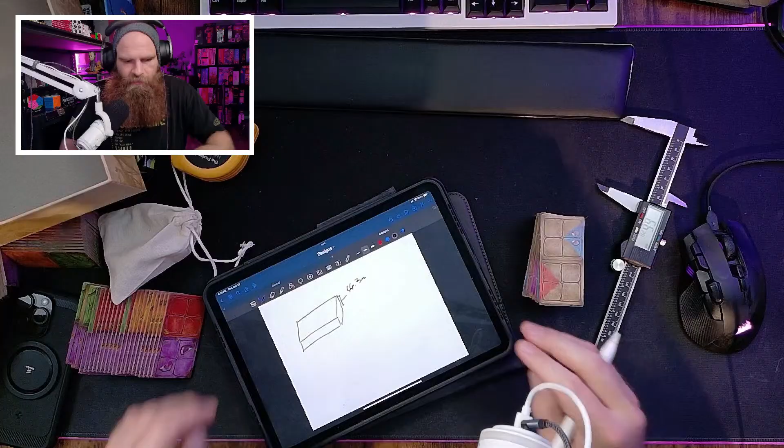So, rectangle, and there's a box. It is 66.3 millimeters in this direction. And what is my width? This box is 180 millimeters. So this is 180, so I have that much room to make.

And really, I don't need too much craziness to make this work. I can make this work with less craziness.

But basically what I want to do is have a tray like so, and then it has the 5 pieces in there. I should probably draw on the 5 pieces first. And in some way be able to grab each piece and then set them down in front.

So let's, man, so many drop frames. What in the world is on the internet right now? Are people destroying things? Let me take a look at the speed test real quick, it shouldn't be that bad.

Yeah, 33, I mean, nothing wrong really. But, you know, it is YouTube, it could be a YouTube problem, most likely a me problem. Oh, now there's no data. Oh, 289 kilobytes upload, oh look at that, I'm getting almost 70 megs up. This is dumb, this is dumb. It is what it is, but we'll bear through it.

So we know it's 66 millimeters tall, we know that we can work with that. Actually, that's the wrong, it's this side, that's 180. Really, so this is 180 millimeters this way. The piece needs to fit in here. And there's going to be a lot of extra room.

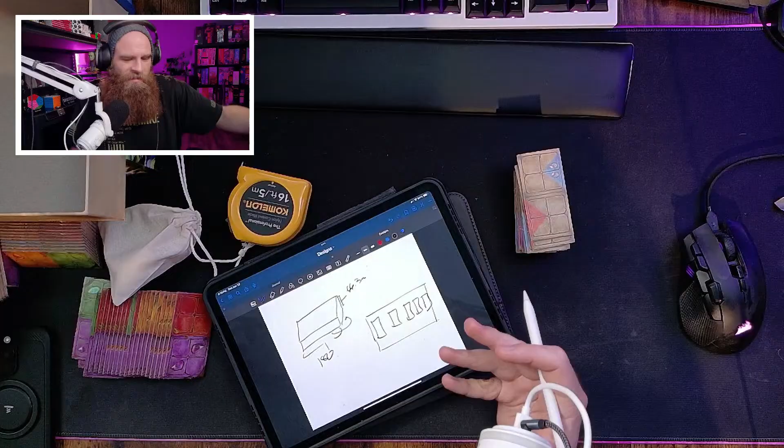I might actually be able to condense both games into one box and then not have both boxes. I mean, that's fine too, or find a new box for it.

So many drop frames, 50% drop frames, this must look horrible. Let me figure this out, hold on. Because that is unwatchable if it's 50% lost frames.

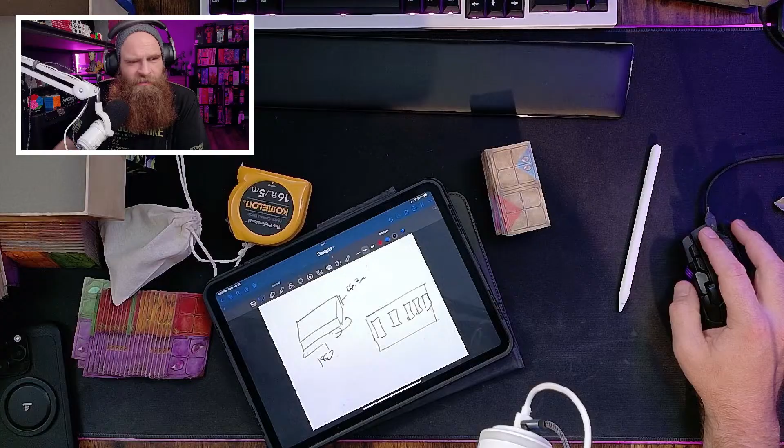No, actually it's showing up fine. I don't know why it's showing so many drop frames, but I turned all the settings down so that would be easier to upload. But it is what it is. All right, let me open up that bigger.

All right, so what I want is a tray. So if we're to sketch this tray out, basically I want these U-shaped finger grabby abilities, that way you can get your fingers in there and grab pieces.

Double tap, boop, delete. Let's draw the finger holes first. So finger hole, finger hole, finger hole, finger hole, finger hole, connect them all. Yeah, something like this. Yeah, my sketches are horrible. But let me put some numbers down here.

Let's do some measurements, what is one of these bad boys? So one of these bad boys is... oh, that was weird.

Alright, one of these bad boys is roughly 81 millimeters. Always give yourself some room. 81 millimeters by 40 millimeters.

Okay, and then how about the other ones? These I think are a little bit wider. Oh yeah, they are 40.09, so 41. How about in the 81 direction? 80 millimeters on the dot.

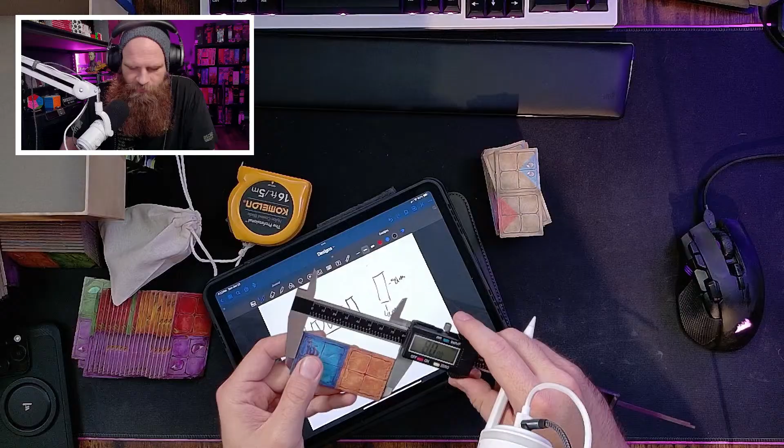So what we'll do is we'll make them fit both. So if this is 40 millimeters, we'll make them 41 by 81. So 41 millimeters by 81 millimeters. And then I need to repeat that 5 times. And then I need to figure out the design, how to put a lid on it.

So let's figure that out. Let's go back to the CAD screen. Right screen? Yes. And put everything back in the box.

So much of a mess I made here. Look at all this stuff on here. I'm just going to put everything in the lid, and we'll figure it out later.

And then what is my height? I forgot that. Overhead, boom. Nope, wrong one. Overhead, so double check. 2, 4, 6, 8, 10, 12, 14. It's 18, yep. What is the height of 18 of these?

It is roughly 47.08. So we'll say 48 millimeters tall.

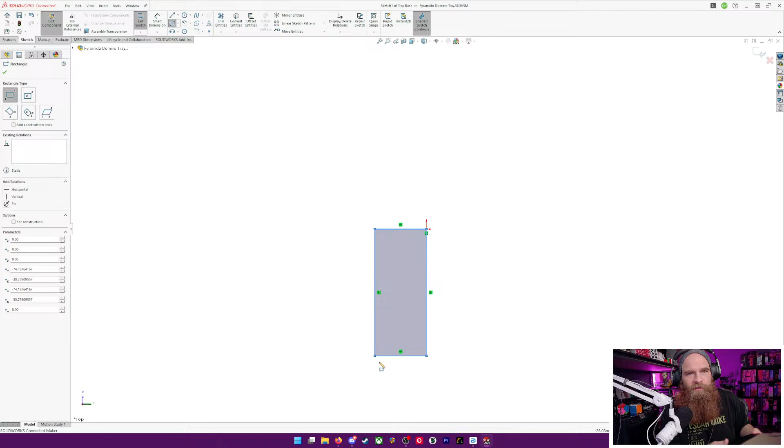We need some rectangulars. So we know that we're working with a value of, let me grab my iPad and actually have it set up with my value so that way I can just go back and forth. So we know that they're going to be 41 by 81.

And I already did not write down the height, so I forgot. I think I said 63 millimeters, I don't remember. 46. So we'll do 48 millimeters tall for each tray. Done, 48 millimeters tall. This is why I have an iPad.

All right, so dimension. So each one of these trays is going to be 41 millimeters by 81 millimeters for each piece, each one of the dominoes.

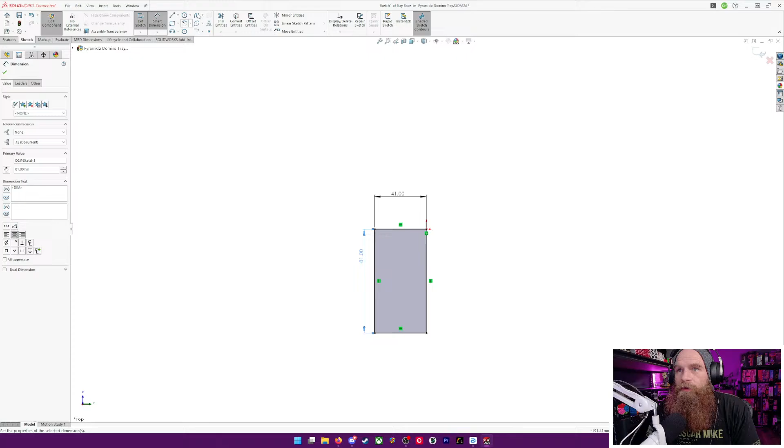And then we are going to linear sketch pattern each one of these. Boom. And we're going to make 5.

And we need to make them, see if they're 41, we'll give 3 millimeters for each one, so that's 44 millimeters. So basically what I did there is, since each one is 41 millimeters, I know I want a gap in between each one. I think 3 millimeters is a little thin.

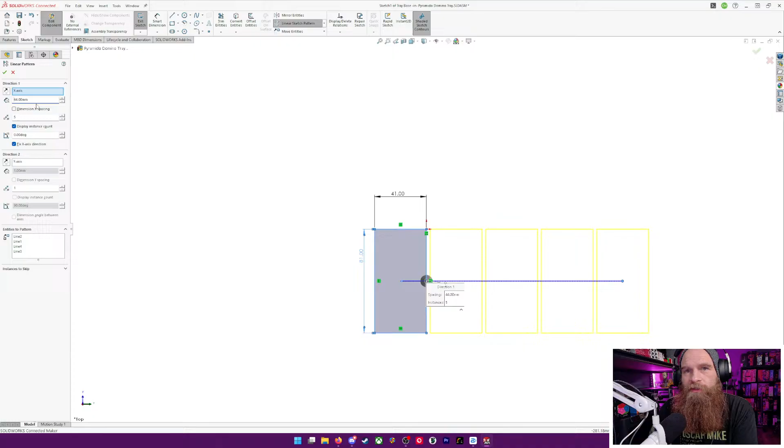We'll do a 4 millimeter wall between each one, so that'll be 45 millimeters. Basically adds padding in between each one. It'll make sense once I hit this button. So basically what I did was I added a 4 millimeter pad around each one, and I'll save that. It's 4 millimeters. So now we have 5 of these, and they're gapped 4 millimeters apart.

You just had dinner, probably continue setting up my new laptop. You have a new laptop? Dang, what kind of laptop did you get? I'm doing good.

So this gives me the dimension I need for my base with each section in there.

So now I need a rectangle around this, and we're going to make that the same 4 millimeters around. Let's do that on the other side. So 4 millimeters, and 4 millimeters, and 4 millimeters, and 4 millimeters. Could have done something different to make them all the same, but that gives us the base of the tray.

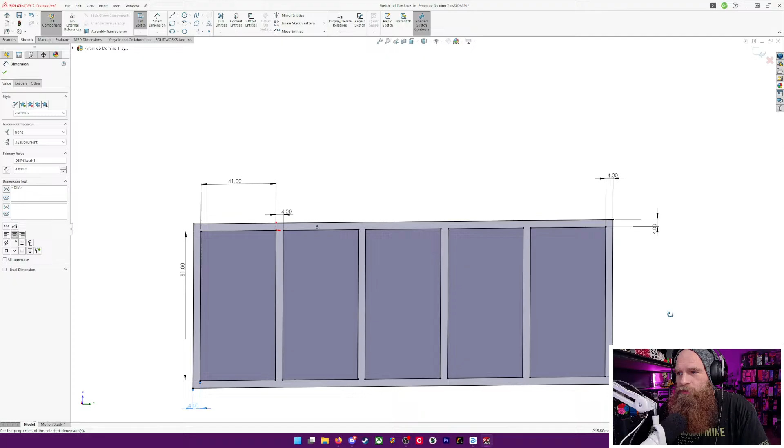What I'm going to do is extrude that the exact height I needed, which is 48 millimeters. So feature, extrude, boom, and 48. And uncheck each one of these. So that gives us this bad boy.

So now we have the sections to put things in. Of course, you can see you can't grab the pieces, but we're going to add some stuff to be able to grab the pieces.

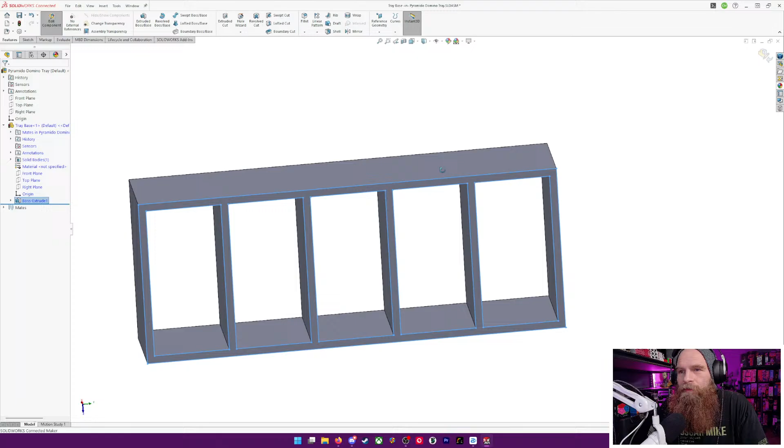All right, this is the bottom, we'll sketch from the bottom. There's a cool tool called Convert Entities, which converts the rectangle into what I want. And feature, extrude boss base, and we'll do 3 millimeters for the base, is fine. Boom. Now we have a box with a bottom.

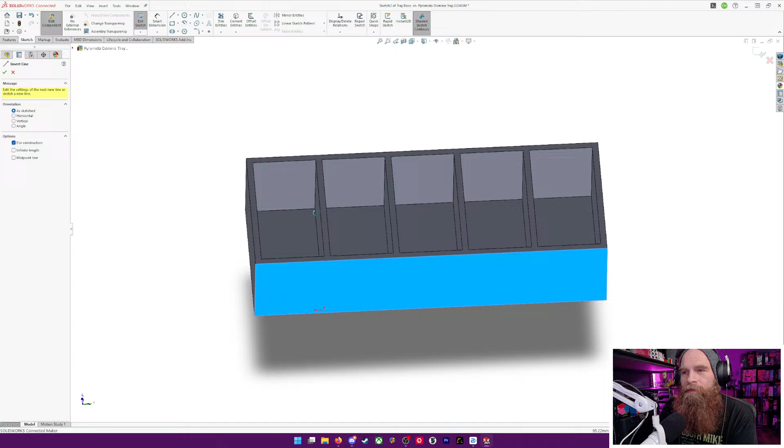Now we need to add the thumb holes. So sketch, and my favorite way of making thumb holes is, let's do a center line. So there's no easy way, because I grabbed the outside wall. The center is probably my best. So let's grab that and we'll do a straight center line from there. And we will reorientate ourselves.

And we'll add a rectangle and a circle. So what I need to do is, one thing I need to do is turn my phone to silent. Boom, do not disturb.

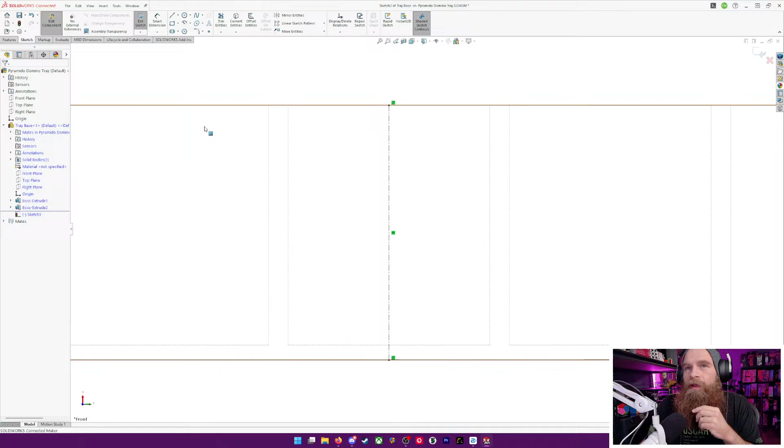Alright, so we need to make this thing clear with lines. One thing I like to do is measure my thumb, just to remind myself, and 22 millimeters. So we're going to go with about 22 millimeters. We'll put this circle here, boop, and we'll smart dimension, boom, go this way, 22 millimeters. And then what I can do is grab this circle and grab this line and make them tangent.

And then I'm going to take a line, boom, anchor point and anchor point, and anchor point and anchor point. And then we can take the trim entities tool and go boop, boop. Oh no, what happened there? That's not right, I messed up, but I think I can fix this. I think I can click this line, click this, and make them coincident. There we go, fixed it.

Whew. It's a Dell 5520. Not a new laptop, but new for me. Oh, heck yeah, are you going to use it to do all your fancy work? Let me turn on my microphone into my headset. That's up, that's better. I have monitoring in my headset, and that was annoying me.

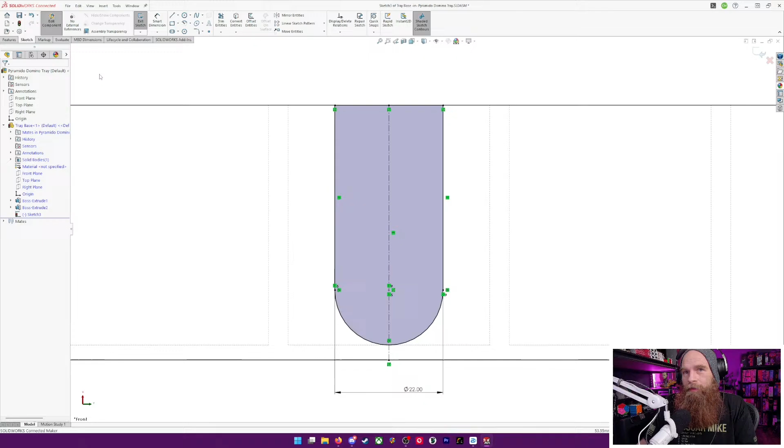All right, so we have the thumb hole, and we need to repeat this pattern. So we're going to linear sketch pattern this, and we're going to pick the y-axis, not the x-axis. None, and 2, and 3. Yes, and if we remember correctly, we did 45 millimeters before.

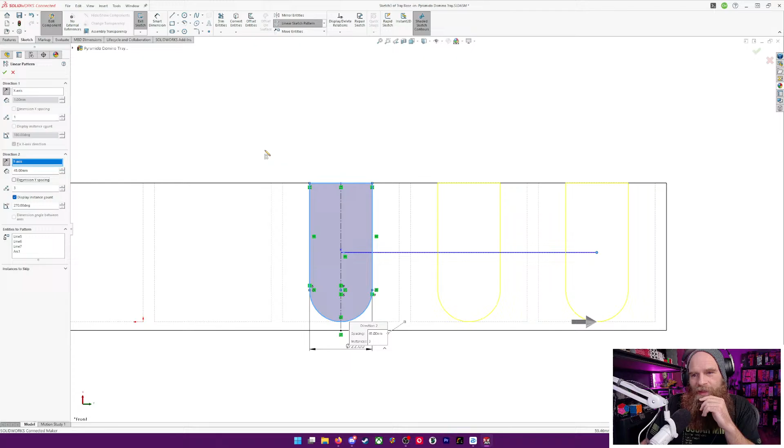So hold on, let me delete all this. Let me delete all this nonsense. Boom, that's gone. Okay, what are you? You're gone. So now that I exposed this, I should be able to do a center line from here. And I can.

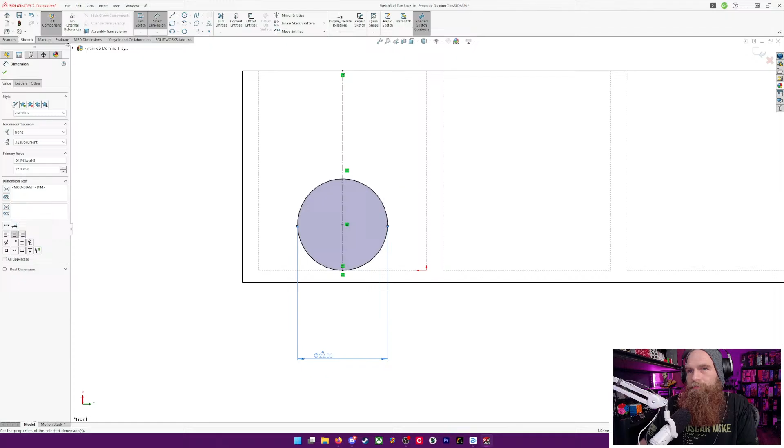And that is vertical, and we'll do the same thing here. And we'll make this tangent to this, and we will set this to 22 millimeters again. And we'll pick the line tool. And boom, and boom, and boom. Trim tool, I really need to learn the hotkeys in Solidworks. Okay, there's our thumb hole.

And now when I linear sketch pattern that, I can do y-axis 5 and do 45 millimeters. Pick the other direction. And boom, there's all the thumb holes.

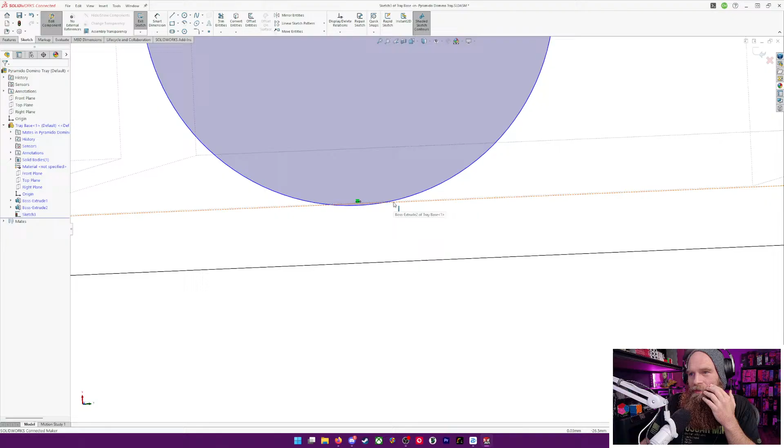Now we need to make sure we dimension these. See how these are light blue and this is black? I mean, this is blue, this is black, it's easy enough. This is telling me it's not dimensioned. So basically, in space, it doesn't know where it's at, and we have to tell it where to be in space. The easiest way to do that is to find a point, and that's going to be, let's see here, where is the center line? Oh, come on, all right, we'll zoom in and do it. So we'll grab this line here, and we'll grab, come on, you can do it.

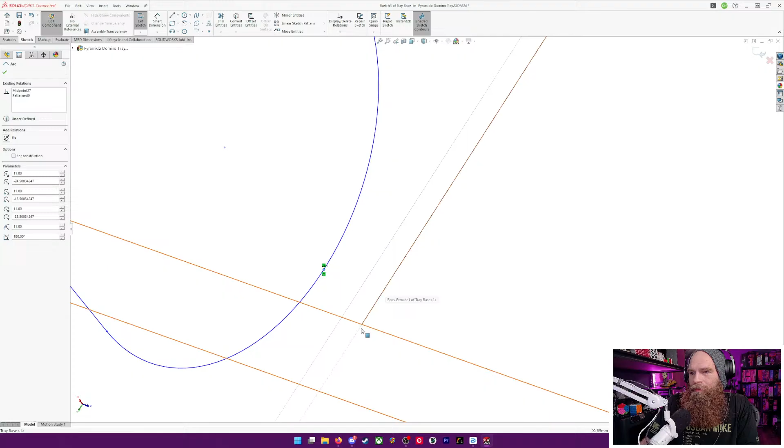It's being a poopy butt. If I go from the inside... where is the center line? In between there and there. Come on, show up. It won't let me select the center line. Come on, oh there it is. Oh it had it for a second. It wants to pop up for a second but won't do it. So we're just going to do it the way I like to do it.

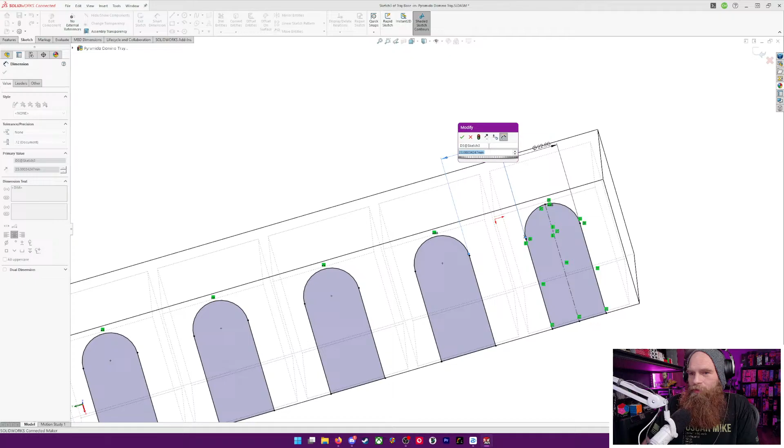23 millimeters. Boom. That is one way to do it. Not my favorite way, I mostly use it for coding, but I'll see what design apps are available for Linux.

Oh, it's a Linux laptop. Ooh.

The other way of doing it, another fun way, is if we were to dimension from this line to the corner, you can see it's 13.5. We can dimension this side to this side, and look, it's 13.5. It also dimensions it. There are many ways to do the same thing.

Now what we need to do is a cut. We need to cut all of those shapes from both sides. Why from both sides? Because we want to be able to grab the piece easily. So, feature, extruded cut, and we're going to go through all.

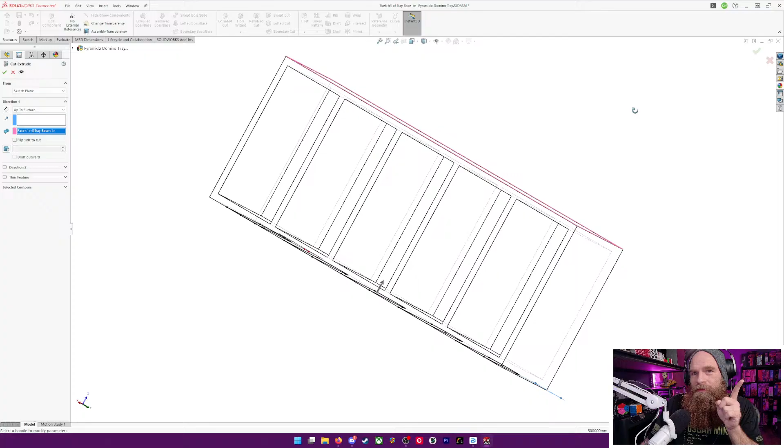Oh wait, actually, it's not going to work through all. I'm going to go up to surface, and we're going to pick this surface. And change our mode back to this. Not actually letting me do that. So we'll do blind, and let's do this.

Boom. So that gives us a little tray with holes for our thumbs to go in there and grab pieces. And we are flush to the bottom there, not even a little bit of a gap.

So the last piece might actually be a little difficult to get out now that I'm looking at it. This is the fun thing about CAD work, you kind of catch your problems in the middle of designing things.

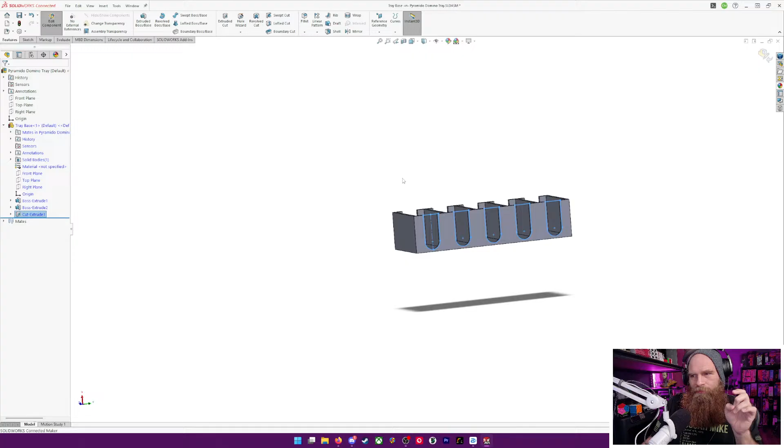Ooh, Linux. The only Linux machine I have is my Steam Deck.

Yeah, that should be fine. I left a lot of room there. Corners on these things are actually pretty sharp, so I can't do any fancy stuff.

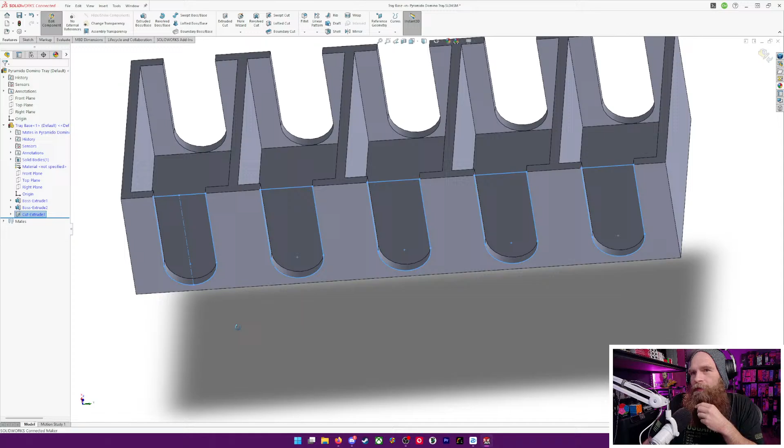The next thing I need to do is either design a lid, or, well, I definitely have to design a lid next. So I'm thinking I make a full box lid, basically just like the board game box. The lid goes all the way and covers the whole thing. That'll make it so it doesn't open up inside. I could just do a small lid, but I think I'm going to do a full lid. So let's go ahead, and I think this is all I'm going to do in here.

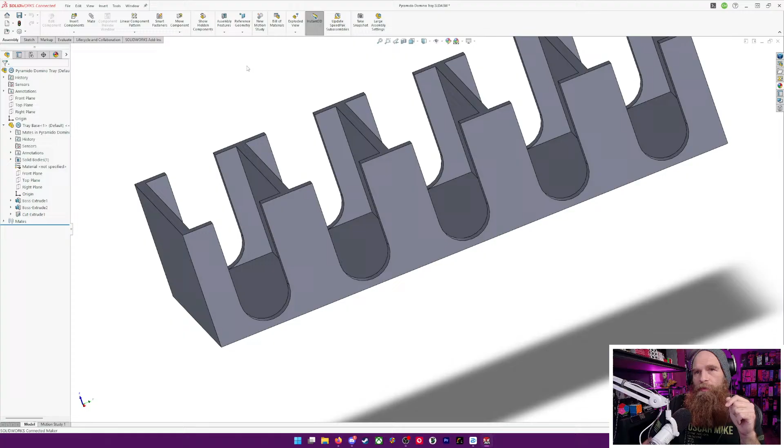So let's go ahead and exit this shape. Let's insert a new component, new part, and we're going to name this tray lid. Boom.

And made it to the roof of that. What I need to do is make a giant rectangle that's slightly, just a little bit larger than that. There are tolerances here. So let's make a rectangle. Boom. Boom. 0.2 millimeters, that's about enough of a tolerance. 0.2. 0.2. 0.2. So that'll give me what I need in that department.

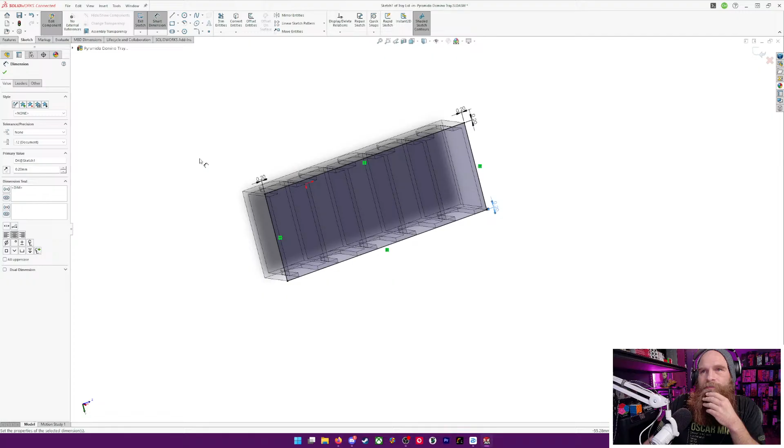Let's go ahead and features. Oh, I actually need more than that. I need a whole other box, a whole other rectangle. Boop. Boop. Again, there's better ways of doing this, this is just how I do it, don't copy me. 3 millimeters. 3 millimeters. 3 millimeters.

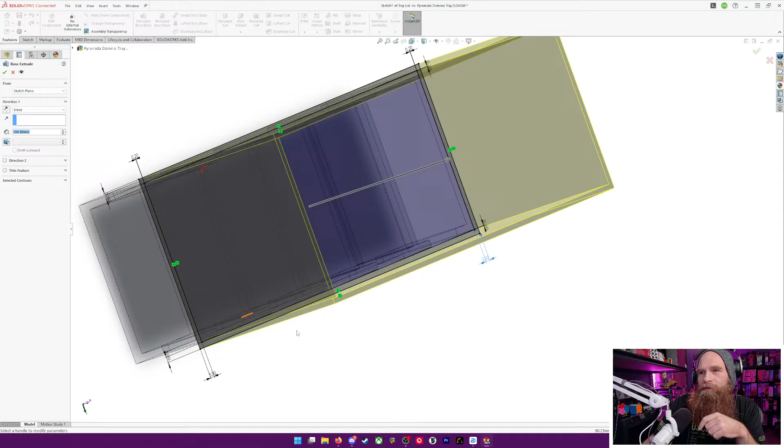3 millimeters. Now we can extrude. Feature, extrude, and we're going to go the other way, up to surface. Boom, that covers the whole thing.

Actually, we won't go all the way up to surface. Offset from surface, and we're going to do an offset of like 4 millimeters. That way you have something to grab onto. Boom.

All right, and then let's put a top on the box.

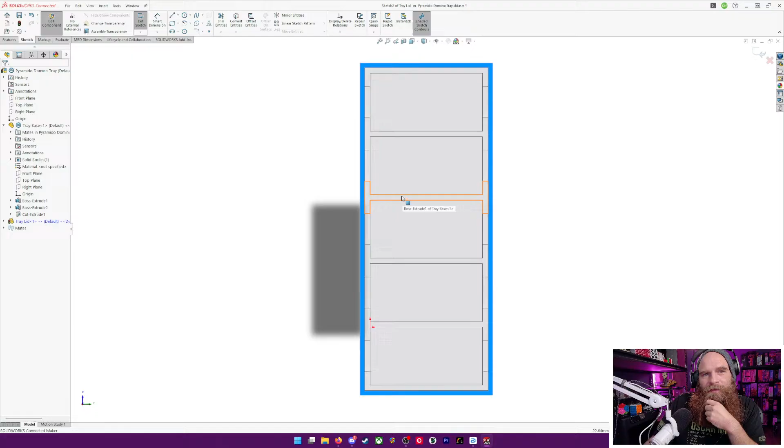Sketch. I like both Windows and Linux. I need to run Windows on my main due to some of the apps I use. Yeah, and you'll get more life out of the laptop in terms of power if you run Linux versus Windows.

All right, we need to convert entities, and feature, extrude boss base, 3 millimeters, and change that to blind. Boom, now we have a lid for the box.

So I'm going to add some thumb holes so I can grab onto that box a little easier, or the lid. Sketch. And this will be easy. Center line. There it is.

And we'll zoom in, and we'll add a little nugget hole. That. 30 millimeters. And here to here distance will be, I don't know, 55.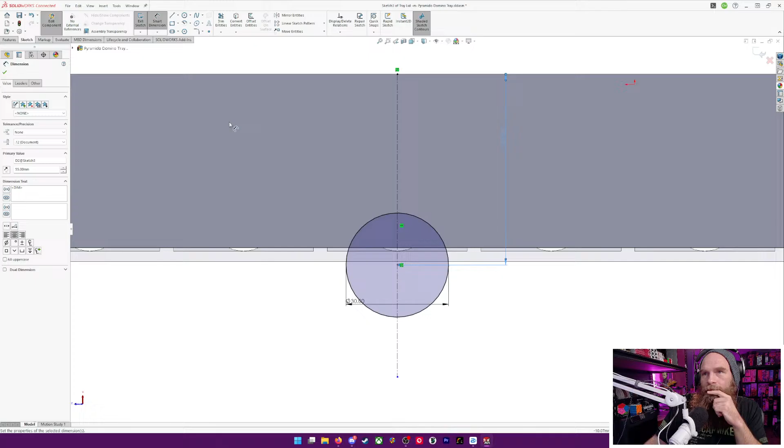Solved. And then we're going to feature and leave the dimension, and we'll make this disappear.

And we will extrude a cut, and we'll do a blind cut, and we'll just grab the arrow and grab the arrow. Blind cut through both. Boom. That gives us that.

And add this thing back. Hey, that actually kind of works out. You can kind of grab in there and be able to get a good grab hold of the thing. All right.

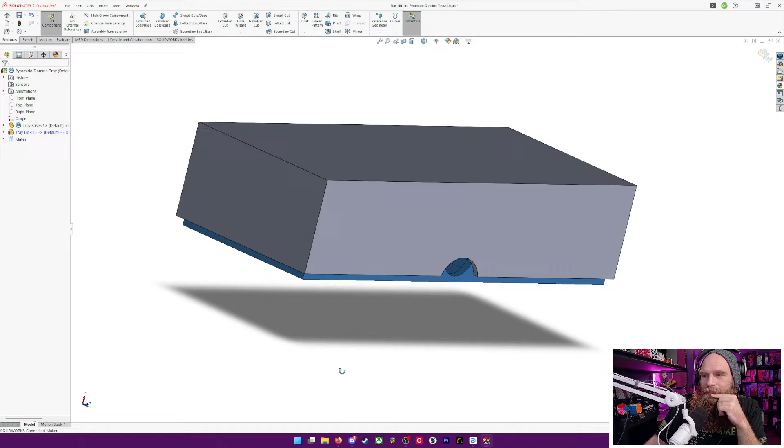And that's basically all I wanted to do. Now we can make it look pretty.

So one thing I learned from the great man Frank, also known as Grubby, is you don't do any of the fancy fillets and - what is it called, it's over here - assembly features, fillets and chamfers and stuff until you're done with the design.

So we are going to do some fancy stuff. Let's go ahead and make this invisible, and then we're going to do some curving.

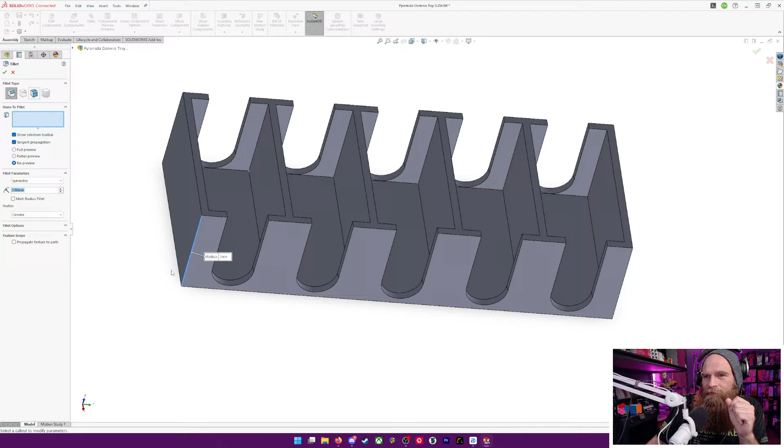So let's do assembly features and fillet. Our fillet is going to be, I don't know, do a 3 millimeter fillet. And we'll do a full preview. There we go.

It's like, why isn't it showing up? Oop, wrong direction, or wrong area. I want to fillet the... what?

I want the outside edges. Outside edges, boop, boop. So that makes the box nice and roundy there.

Boom, and then we're going to do a little bit of that also for these corners. You don't want to cut yourself. Boom, fillet, and we're going to do a 5mm fillet.

Let's take a look at what that looks like. Yes, that's perfect.

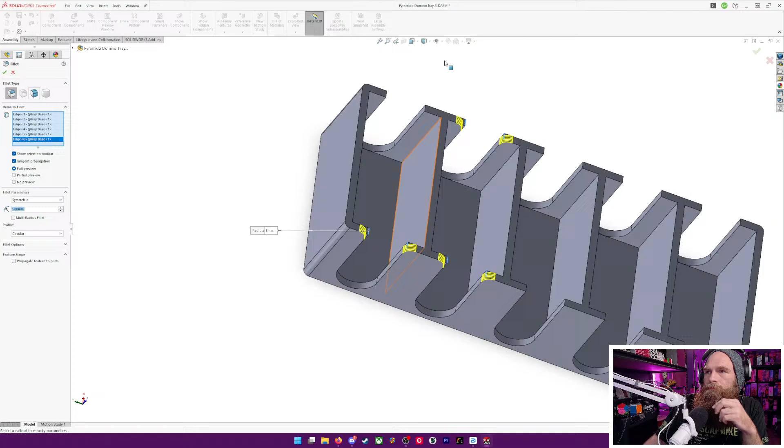All right, so close. Okay, that's all of those, and accept. There we go. Now each one has a nice little home there.

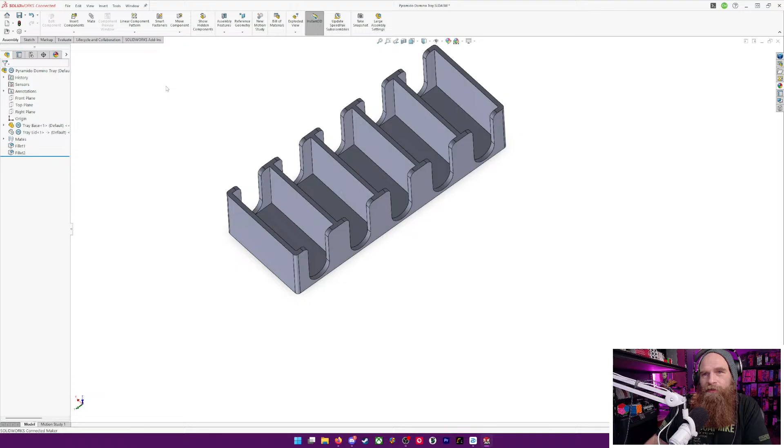And then we're going to make the box lid look better. So let's hide this. Oh, actually, let's hit save. Save all. I haven't been saving.

We'll hide that and bring this back, and then we'll do the same. Fillet. Boom. And it's going to be back to 3mm.

And boom, boom. And actually, we want to do the inside as well, because we can. Oh, that was the inside on that one. Alright, that's cool.

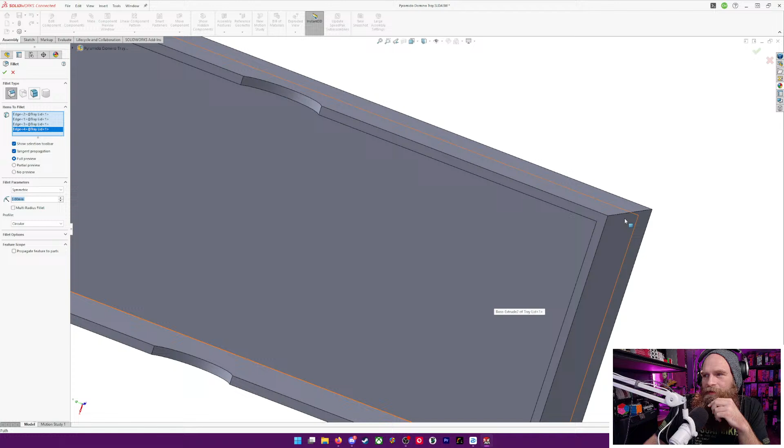You can tell I've been doing this for a while. Alright. Boom. No! Not the whole surface. Alright.

Okay. Not all of them, you silly goofball.

Okay, and I guess I'll also do this, because we don't need to cut our fingers.

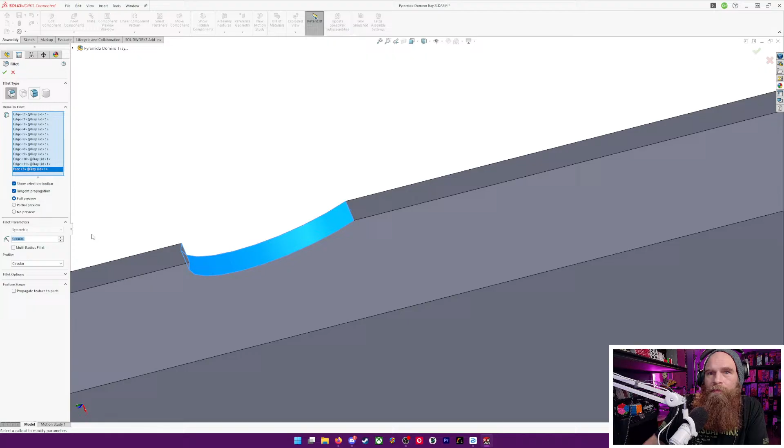Oop, delete. There we go. And boom.

There we go. And we bring this thing back in. Boom. Look at that. Yeah.

And then I think I can do this and change the transparency. Yep. So now you can see it'll hold the things nice. Nothing's going to fall out.

The lid should basically lock on itself. I might use like a rubber band or a hair tie to hold it in place. Again, I could get super fancy and make like a locking lid or something like that, but I think this would be great.

It's going to hold all the pieces. Dimensionally, it's going to fit within everything. Let's actually take a look here. So the biggest thing is going to be the lid.

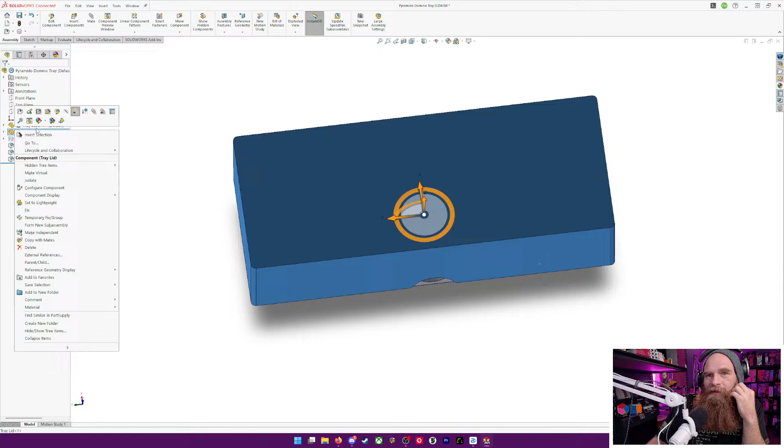And lid, and edit - oh, I can use the measuring tool, but let's just edit the sketch, and dimension. 235mm.

So let's see, where's my tape measure?

So I have 270mm to work with in that direction. That's actually a lot bigger than I thought it would be. And this is a little over 180mm in that direction. I'm actually surprised.

Make sure I measured everything correctly, because the nice thing is I can dimensionally change things and everything updates itself. Yeah, 40mm. 40 times 5 is 200. So, and then you add the little bit of extra dibbity doobs I added. So it will fit in the box, and it'll be a nice little piece here.

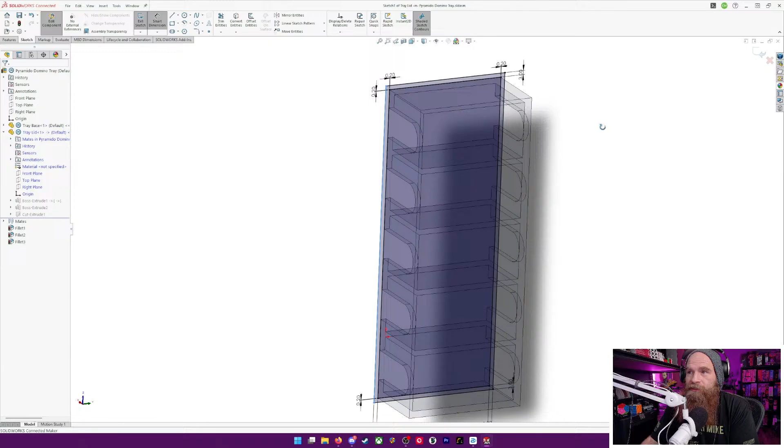So exit. Discard changes and exit. And exit. Boom. And that's it. In 40 minutes, we designed a box.

So now we just have to do file, save, then file, export as, and we're going to go to... oh, I don't have a Solidworks folder yet in here. Storage, Solidworks, board games, Pyramido, and yep, step file, export.

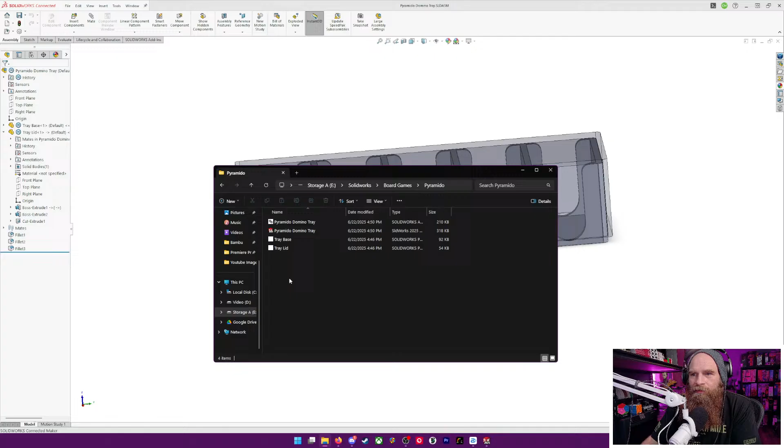And then if we go to look at that, Solidworks, board games, should give me one for each file if I did this correctly. Yep, there's the base and there's the lid. So it gave me each file separately, and if I load that into here, let's load up our slicer.

Oh. And I'll come back one day when I'm done printing it. It shouldn't take long to print, but let's see, new project.

Boom, and load. Come on. Okay. Did it not save it as a step file?

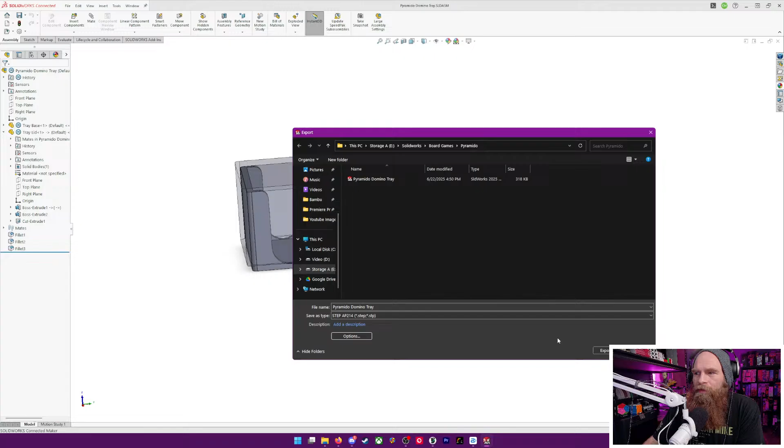Oh, it didn't. It gave me, oh, it gave me this. Okay. Let me go back here. File, export as, options, export assembly components. There we go. Boom. And export. Yes. So that should solve that issue.

Yep, there it is. Tray base, tray lid. No. You're so weird. And deselect. Come on. Ugh.

There we go. And place on face. Place on face. And arrange. It made a separate piece for it. That's so dumb. Alright, we'll grab this.

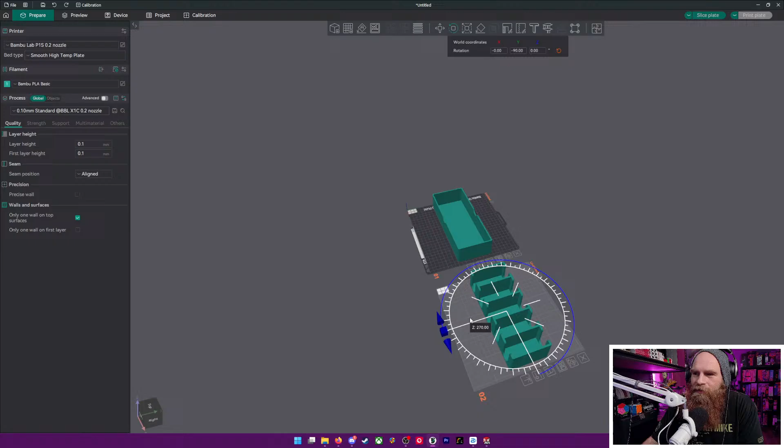We'll hit R. We will rotate that 90 degrees. Bring that back over here. We don't need two frickin' plates for this. There we go. And you go. There you go, delete plate. There we go, there we go. There's our tray and lid.

Hey, what's up, Jeremy? Yeah, so we finished CADing this thing already.

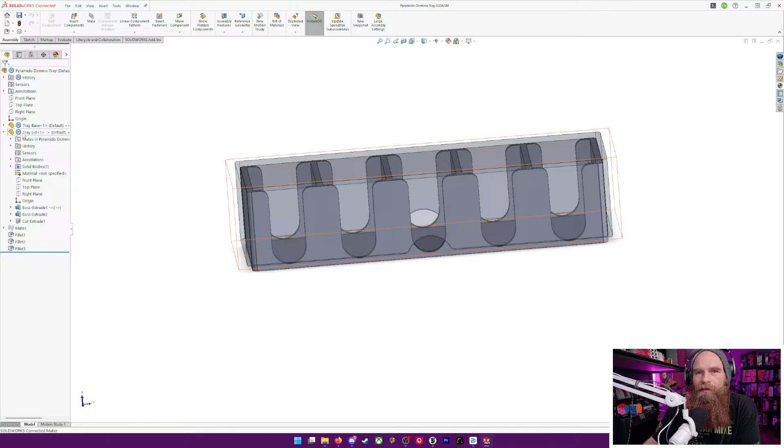You know what? I think I'm going to make the walls thinner. I think that made the walls a little too thick. So let's actually go back into SolidWorks real quick, and tray base, and we'll redo everything. We'll go to 3 millimeters. I mean, it should be fine.

So, edit component, and edit sketch. And we'll change this to 3 millimeters. And we'll change all of these things to 3 millimeters as well.

I really should have made that. You know what? So we'll make this thing equal to this, watch, you can do this too. And then click this, and you go equal to this. And you click this, and you go equal to this. Now we only have to change one in the future.

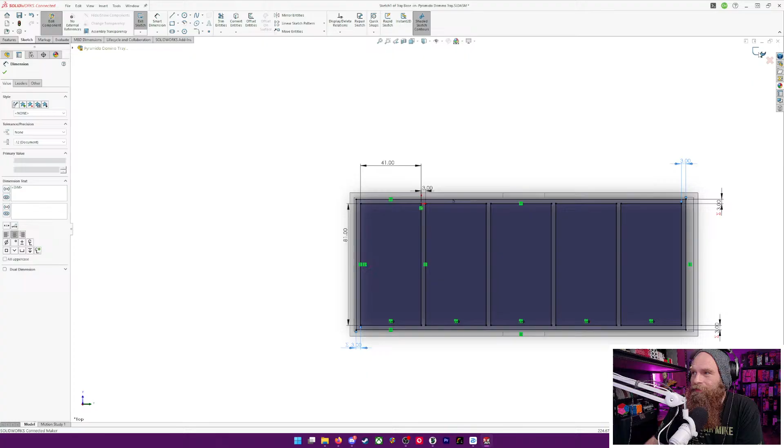So, boom. And hit this button, and now everything has resized itself automatically because everything is constrained correctly. Always make sure you do proper constraints, folks. That way, when you mess up, you don't like something, you can just change one value, and everything is correct.

So let's also fix this component. So, edit component, and we're going to edit sketch. And what did I do? Oh, I did 3 millimeters for that already. That's fine. That's fine.

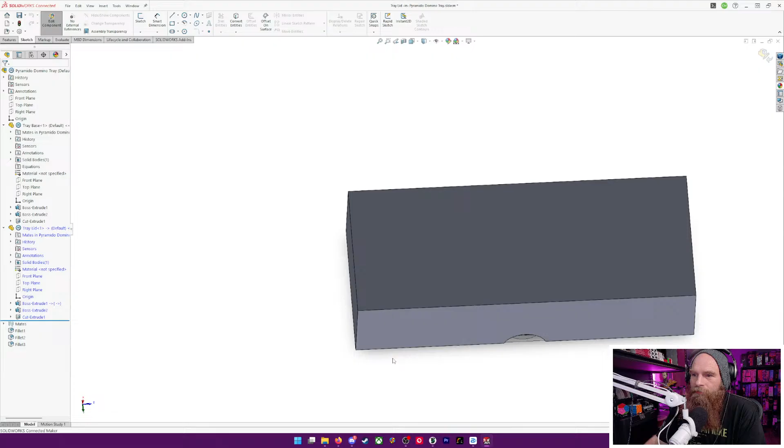Oh. Boom. Ugh. More drop frames. This drop frames nonsense, man. Like, I gotta figure out this internet here. Actually, it's never been this bad, so I don't know what's going on. It is Sunday, and everything else says it's fine. So...

Yeah. So let's re-export this. Let's hit save, save all. And file, export as, and v2. And let's see if it actually did it correctly this time.

So, oh, it didn't re-update. Oh, it did. It did re-update these files. 756, 756. 752 is when it updated the last one. All right. So let's go back into this, and we'll delete these.

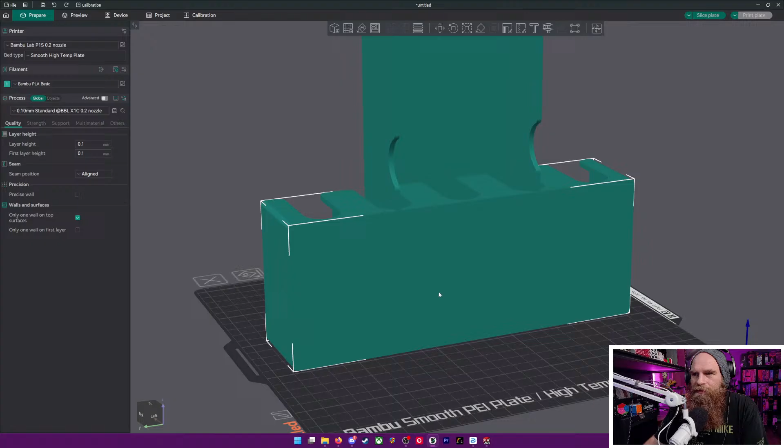Delete, delete. And we'll see if that doesn't look as crazy thick. No, those are not two of the... and place on face. And actually, I'll do this. I'll do place on face that way, and then I'll place on face this way. And then we get off of place on face, and we go back to normal.

Yeah, that's better. It didn't need to be so thick. And there we go. Arrange. So yeah, this will now print beautifully on here. It'll fit in my fancy box.

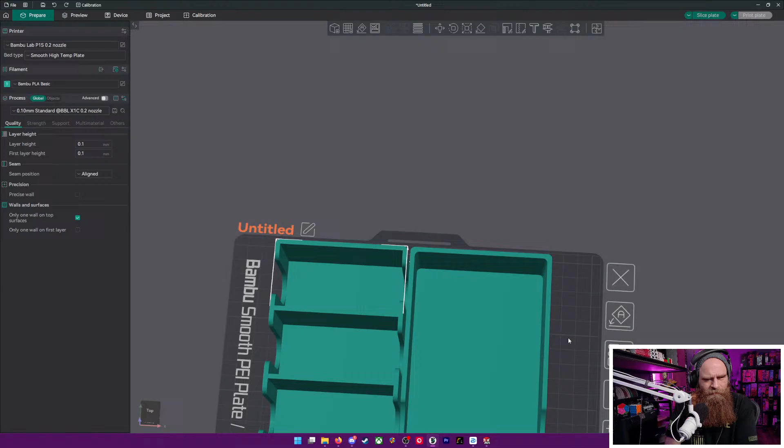And yeah, that was a fun hour's worth of, not 45 minutes worth of work. Oh, so good. Ugh. Man, those damn drop... it's still bothering me that I'm getting drop frames. So, it is what it is.

I got Wi-Fi 7 here, a Wi-Fi 7 card and a giant antenna. I mean, it is wireless. I really should go wired, but this office is the furthest possible from the internet. The internet box is upstairs, like 150 feet away, and I'm off a mesh to a mesh. That shouldn't do anything, but my upload speeds are still like 90 megs down here, sometimes 60, which is more than enough. I set my upload settings to 5 kilobits per second and it's like, no, I can't even do that. But yeah, it is what it is.

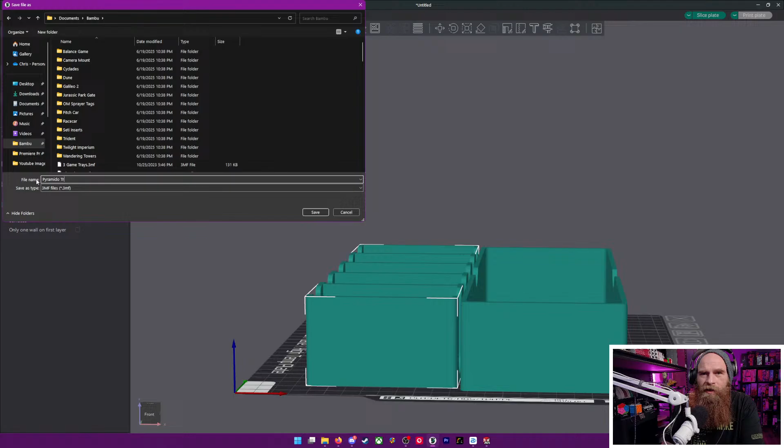All right, we will save this. Save to this area, and we'll do the pyramid tray, domino tray. Okay, that is done. We did it. We made a tray.

I'll print it out and show everybody. I mean, it's literally what I do. I do a lot of trays - that's what I've been basically printing, because 3D printing has become more of a hobby that helps my other hobbies, you know what I'm saying?

Oh, I don't have a game up. So yeah, let me see here. Do I have, yeah. Let me slide some things down and move this microphone out of the way, and then do overhead.

Oh, that's a beautiful sound. You can see all this 3D printed wonderfulness. You can't see it from here because it has its own fancy tray, but if we look right over here, we got a fancy 3D printed tray that holds these pieces. And all of these pieces are pre-organized into their own little trays. So when you play the game, you just go, oh, this half the table gets this, and there's another tray for the other half. So that way you don't have to keep all the resources on one side. Again, it just supplements my other hobbies.

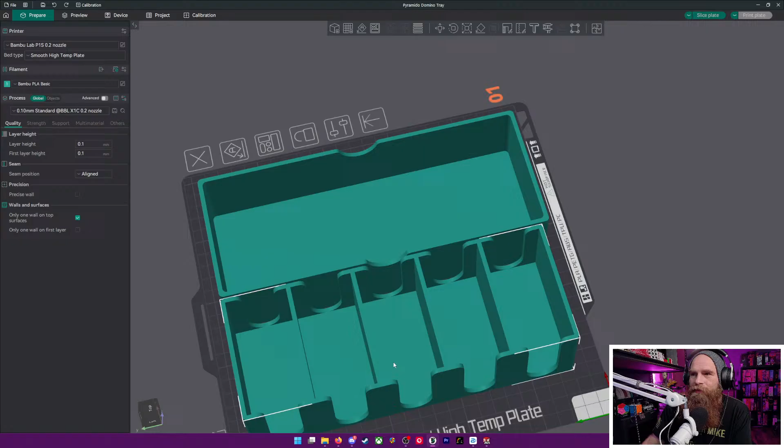See, I wish this had the same feature as my CAD software. I love in the CAD software, wherever my mouse is, that's where it zooms into. So if I zoom into here, that's where it zooms into. If I zoom into here, it zooms in over here. That way you can quickly go where you need to go. I want to zoom into this. I want to zoom into this.

But we'll save. Is there anything else I want to CAD? Let me think here real quick. This will actually fix two games for me. And what else do I have? No, because I titled this video just Pyramido, and the algorithm probably won't like that.

But I have a stack—this whole cabinet up here is games that need inserts for. Some of them already have, like if I go to Printables, there'll already be inserts for these games. But almost every single one of these games needs printed inserts. There's 160 board games, so there's quite a few here, quite a few over here, but this is the pile that I know needs to be worked on.

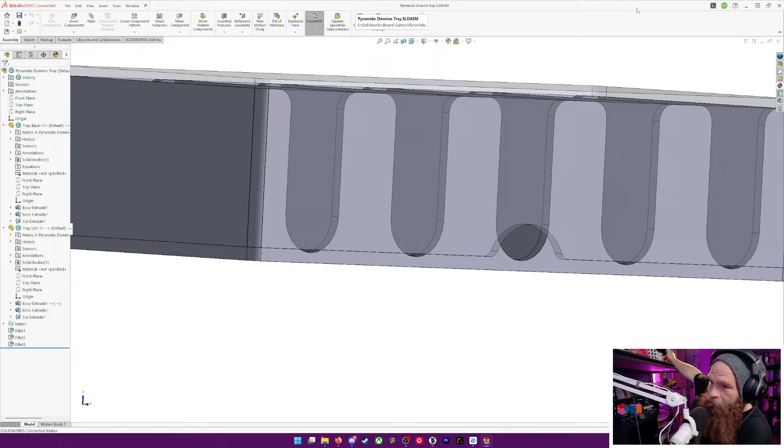There's things from... Rock Hard 77 or something like that. Quacks, the Lego board game, Cryptid. Actually, I think Cryptid has an insert. Ankh—Ankh probably doesn't need an insert, but I might make one.

But all right, that was it today. We made our insert for Pyramido. We are done for the evening. I'm gonna go relax and probably...

Oh yeah, I was gonna figure out how long this is gonna take to print. Overhead, no, not overhead—right camera, and zoom in. And does it even have my correct... let's see here. P1, yep, PLA Basic. And why is it set to X1C?

I didn't set up correctly. Yep, sure didn't.

Hey, what's up, Gigi?

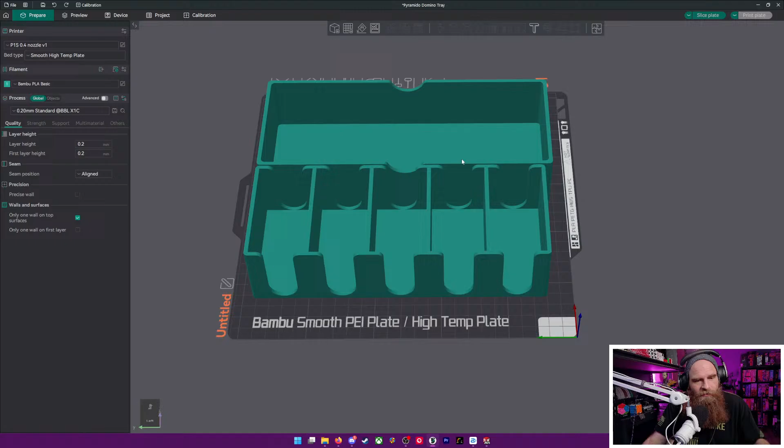Yeah, you just missed it—I just did some CAD work, and I made this tray for my game of Pyramido to hold these things. I guess we'll slice the plate and take a look.

Oh wow, it's going to take 5 hours and 41 minutes. I meant to be streaming myself at the moment, but the aircon man won't leave my room. Yeah, you got to get the air conditioning. It's warm, it's warm here.

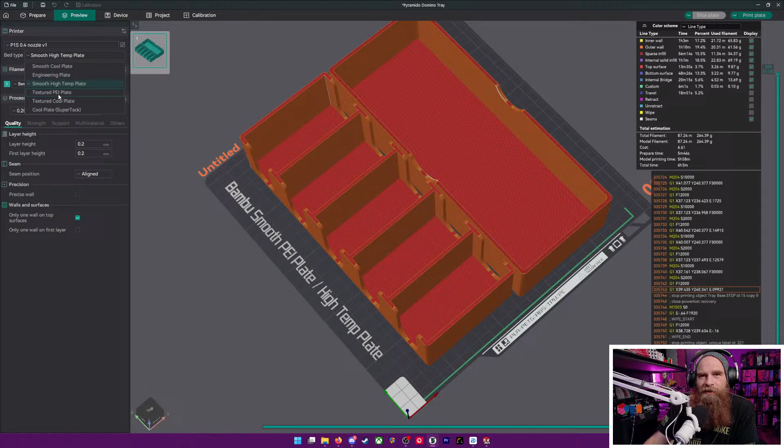Whoa, yeah, these settings are way wrong compared to what I like. Where's my... yeah, there we go. There's my user preset, normal print. Slice plate, don't need no silly brim—I keep my bed clean. And then I'm not on the high temp plate, I'm on the textured PEI plate. There we go.

It is for the game called Pyramido. It's on Board Game Arena. But I have two versions of the game—this is Pyramido that I don't like as much, and then I have the new version, the Forgotten Treasures version, and that game is awesome. Yeah, I needed a nice tray because it just sits in a cardboard hole, and this would be a lot nicer.

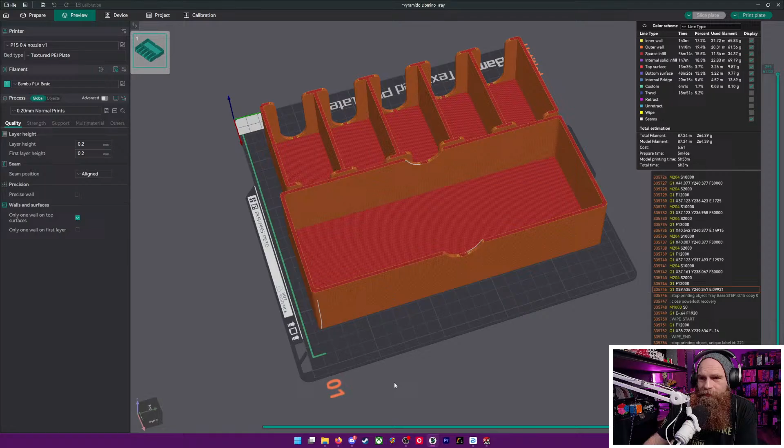So 5 hours, almost 6 hours to print this, but that's okay. I won't print it now because I'll still be printing until I want to go to bed.

What game are you going to play, Gigi? Or what are you going to stream tonight, Gigi?

Oh, my focus is off because I recorded some stuff—I actually recorded board game reviews. Manual focus, and I think it's this button. Yes, I got manual focus control on my camera with my Stream Deck.

Ugh, I also did download Dinkum. I've been playing that almost every night before I go to bed while I'm laying there with my Steam Deck. Speaking of things with the word deck in it.

Oh man. Ooh, I can try one of these setups here. Let's see here.

Overhead cubing—so if I were to do some speed cubing stuff, I need to open this up. That work? Yeah, that works. And then I need to go here and go to, where is it, CS Timer. And then this can go over here. Yeah, now the timer will work.

So if I wanted to solve this cube: R, D, R2, D, L, B2, D2, L, D prime, B, U2, B2, L2, front, back, D2, L2, back, U2, R2. And that shape—yep, that matches right there, sort of. Nope, I messed up somewhere.

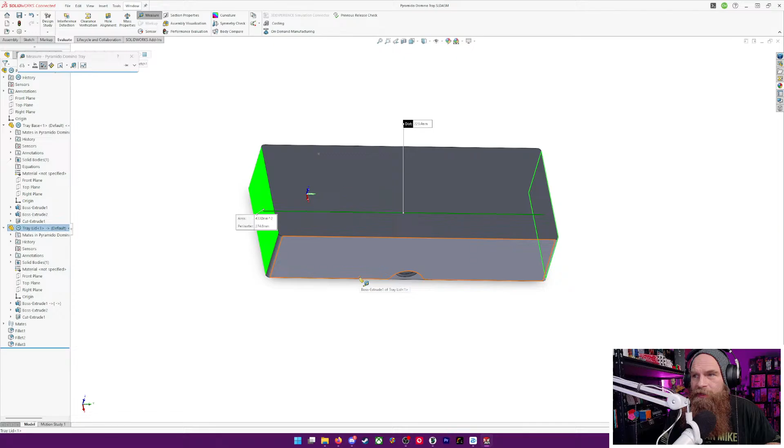So the inside of this box is 265 millimeters. So 265 - if I disappear rudely, it means the aircon guy has grabbed me for a chat.

So we need - what did I say, 265? 265 minus 230, well that's easy, that's 35. So I need something that's 35 by 180.

All right, so let's make a new design here. So, boop boop, and we'll make it like a spacer. Doesn't have to be anything fancy.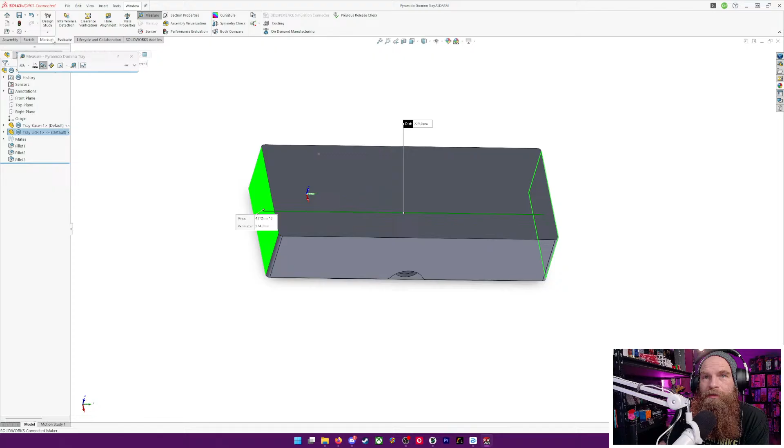New - we gotta close this. Assembly, insert component, new part. And it's going to be called a spacer. And it's going to attach to this face.

Actually, I shouldn't have done that - that's a horrible idea. Control Z. Yeah, let's...

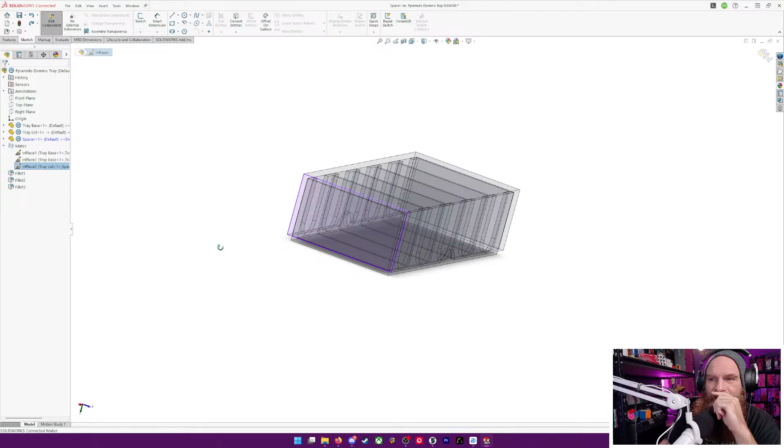Mates - yep, we need to change that mate. How do I change that mate? I mean, that works, it's not the best. I probably shouldn't have done it off of that face. Whatever, I did it off that face.

So, rectangle - no, let's leave that. Let's go back to here. And rectangle. And I need this corner here - is that the corner I want? This is the only problem when it's... oh, there we go, that's so much better. Why can't I... oh.

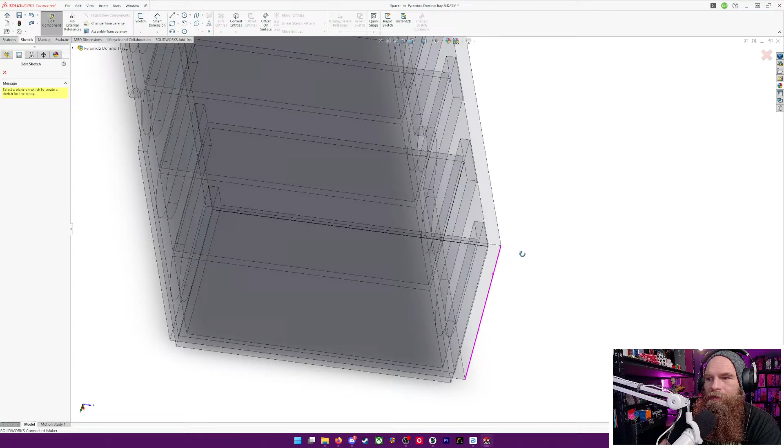Oh, I hate when it's transparent. I messed that up. Where is the different planes? Aha, see? I moved to the wrong spot. There's the front plane. And now when we draw a rectangle here...

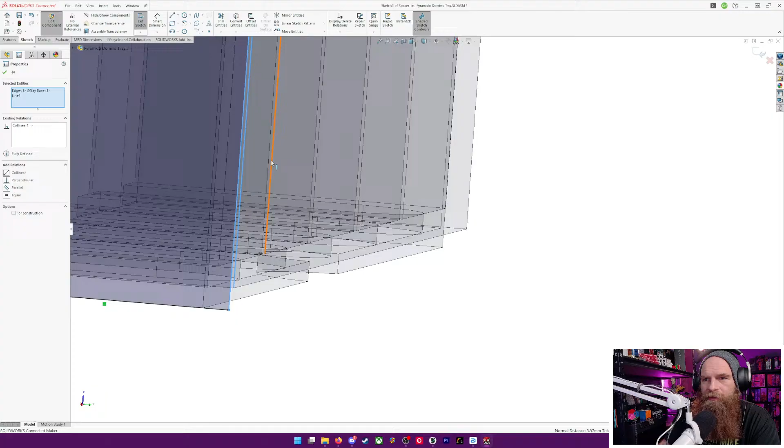We're going to go from here. Boom, okay, and escape. And I need this line and this line to be collinear. And I need dimension of this.

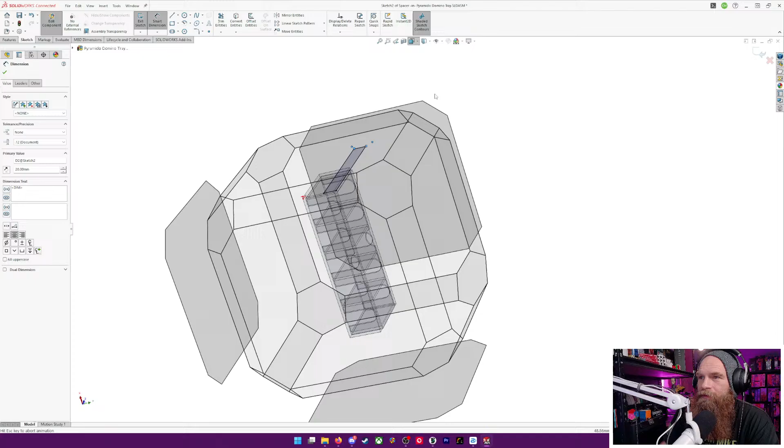And that needs to be 180, so we'll do 179 millimeters. And I guess we can make it the same height as... no, we won't make it a giant thingy. We'll pick 20 millimeters. And orientation, and here. Okay.

And I did not design this correctly. I really should have done a better job. Alright, boom, and then feature, extrude boss base. And we said 35, so I'll make it 34 millimeters. Boom.

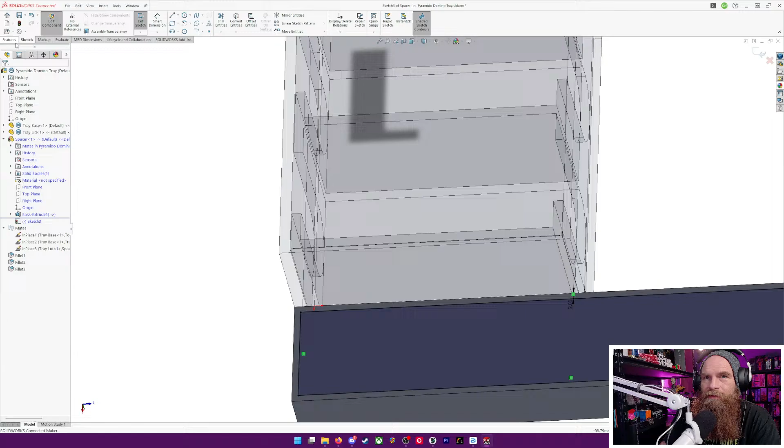This is horrible. Sketch! This is not how you should design anything, by the way. Offset entity, we'll do a reverse, and we'll just make it 2 millimeters inset. Boom. And then we'll feature extruded cut.

And we want to go, how tall did we make that thing again? 20? So I'll make it 18 millimeters. Boom, there's a little spacer tray. And then I'll make 2 little trays here to hold stuff, and that'll just make sure things don't flop around in the box. That's all we're doing here, just making trays so things don't flop around like a crazy thing.

But what I want to do is leave this. Boom. And then insert component, new part. And this will be... component tray. No, component holder. And we'll use just the bottom of the whole thing.

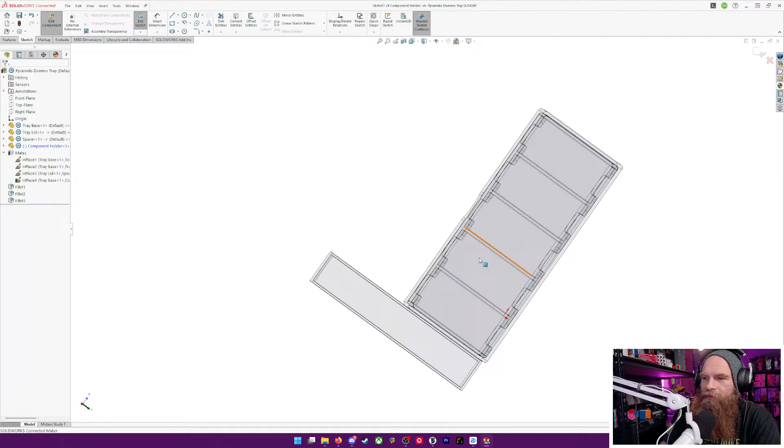And corner, give me this corner. Boom. And what is the dimension between this and this? What is that? Oh wait, I know what that is. 230 millimeters. So I need this thing to be half of that.

So smart dimension, you can even do math in here. So like I know that it's 230, you can do divided by 2. And that gives me 115.

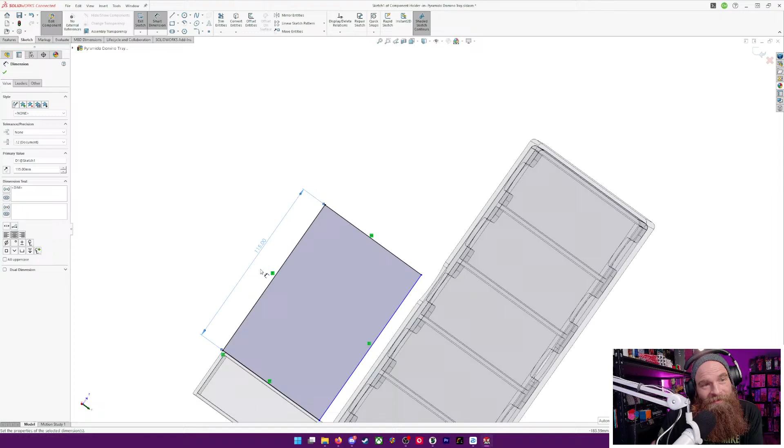Dun dun dun. I think that's correct, right? Is that what we said it was? Because it was 229 point something and 35 millimeters, I think. This is what I get for not doing this better. Alright, so 115.

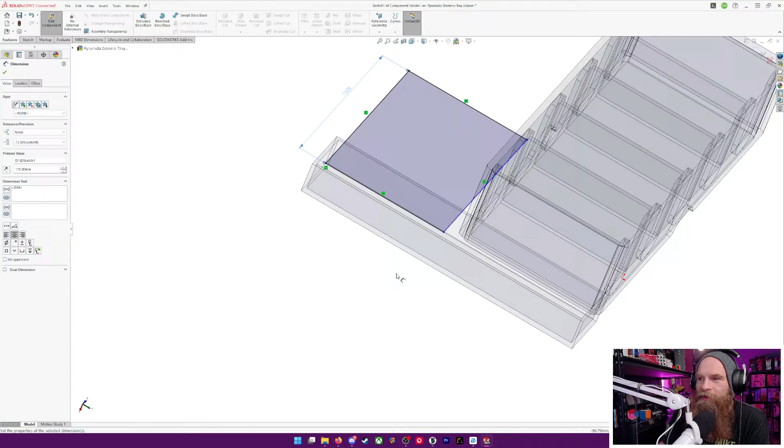And boom, and we will feature extrude boss base. Oh wait, that's not going to do me any good, I didn't line it up to that. So we're going to dimension this to here, and we'll say 0.2 millimeters, so we'll give a little bit of gap there. There we go, and now we're done dimensioning.

And then we can extrude boss base, and we're going to go from blind to up to surface, and we'll make it just as tall as the box. See? Boom.

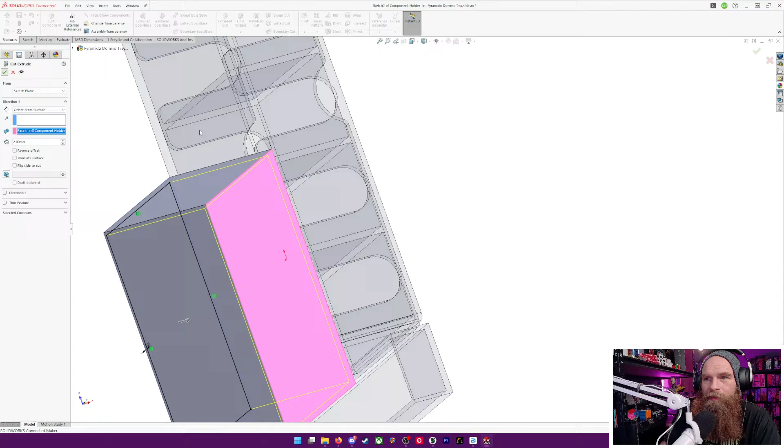And then sketch, and offset entities, reverse, boom. And then we're going to feature, extrude cut, and we're going to do offset from surface. We'll pick the bottom and we'll do 2 millimeters. Boom, there we go, there's a little box.

I'm going to throw all the giblets in there. And then, if I remember correctly, boom. Okay, boom. And then if I do...

Component pattern, linear component pattern, okay, insert the same component. Cancel. Cancel, cancel, cancel.

What's the best way? I always thought I could make a copy, but I guess I can just do this.

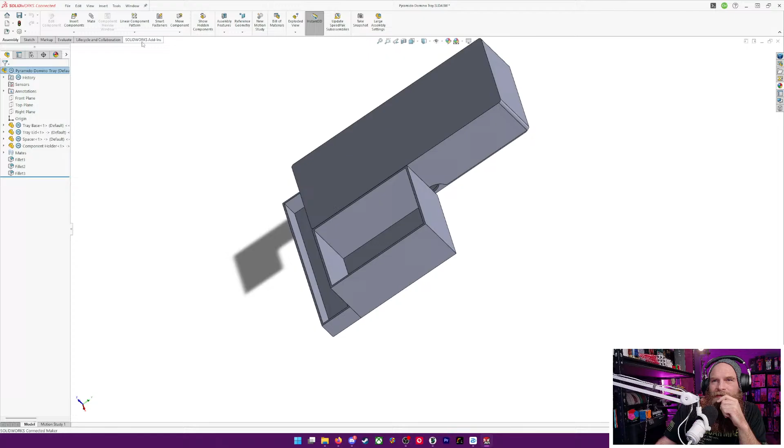Linear component pattern, and we're going to component this component. No, not the face, direction. No. Delete, delete. And we'll pick this. This. No, not that edge. Delete. This.

And direction, one of them, distance is going to be 115. Can I view it? There we go. Boom, now I have two of the same component.

So it would look like this in the box. So this is a little spacer slash I can throw like a marker in there for the dry erase thing, and this can hold this and that. Again, there we go.

Okie dokie, so let's go ahead and save, and we're done. Save all, now we're done.

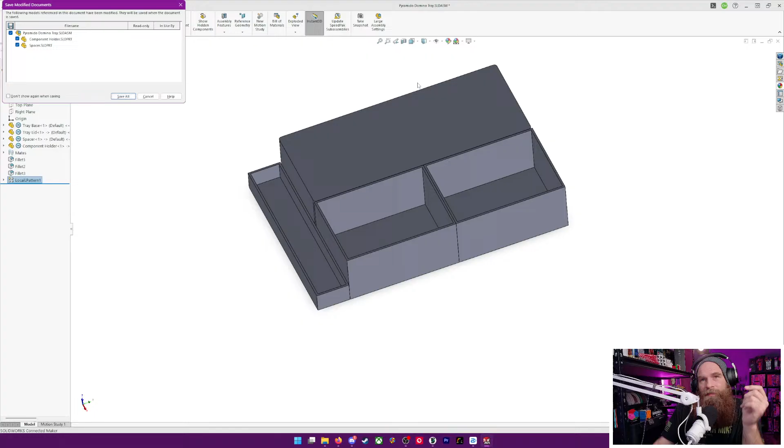I'm going to go before my internet gets worse. I still can't believe the internet's so bad. I lost 83,000 frames, jeez Louise. I need to figure out the internet issues here, that'll be my goal, because live streaming is going to be hard if I keep losing this many frames. So, alright, that's all.